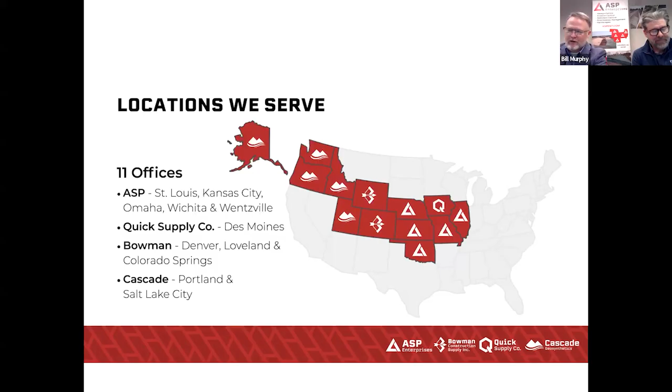As you know, we have a whole lot of solutions. And if you don't know us, go visit our locations and go see us. The banner behind me says ASP because I'm in one of the ASP locations. We're in Kansas City right now, live. If I was in one of the other branches, one of the other companies, I'd have their banner up, but I'm still representing all of them.

And I hope you're seeing this. We'll see if Mackenzie texted me. Product displays and warehouses, we even give tours. Thank you, Mackenzie. We even give tours to some city and DOT folks if they want to see what we have. I've done it in a number of locations, most recently in Bowman Construction Supply in Colorado Springs, which is already outdated because we just opened our brand new branch there last week.

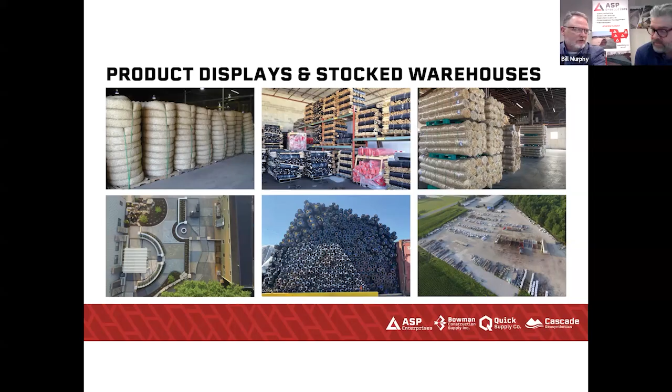I heard that. So, vast inventory ready to deliver. I just talked to one of our drivers here today, he grabbed a little pizza on his way through. Thanks to Todd buying lunch for us here. And I already said his name, and there it is, there's the intro.

I didn't bring your bio or anything. Guys, this is my longtime friend. I don't know how long. Todd Noble, you were in Lee's Summit at the time, and it was September 2014 that I joined us. So, 12 years, 13 years, I've been working here.

Yeah, when Bill originally reached out to me about doing this, I kind of wanted to mix it up a little bit, knowing that your customers see a lot of technical talks. They come to Clean and Green, they've heard Flexamat before, so I don't want to give them just the same presentation. So the thought process here was how to mix it up, how to take a little bit deeper of a dive, let's show inspectors what to be looking for out in the field.

And then when we're doing that, so I've been with Flexamat for a year now and been on the road a lot. And so I tried to incorporate some new projects that we've installed just this year, so that ASP, Bowman, Quick Supply can actually see some of their actual projects from this year in some of these photos.

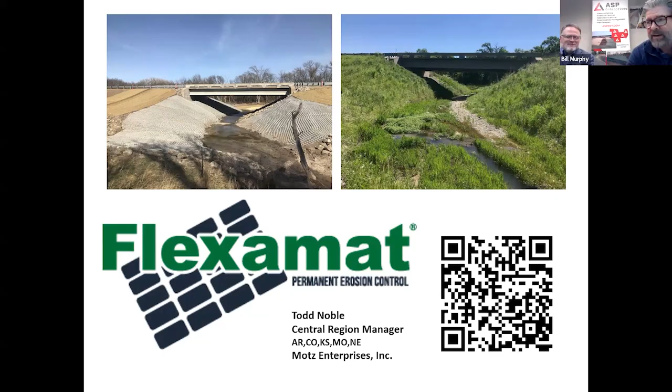So let's talk tech with Flexamat. What is it? It's 5,000 psi concrete, 6.5 inches by 6.5 inches by 2.25 inches tall, in a pyramid shape, embedded into a high strength geogrid with 2,055 pounds of tensile strength in 2 different directions. That strength and pyramid shape allow it to be rolled up and delivered to a job site. Our roll widths are 4-foot wide up to 16-foot wide.

We can do rolls up to 125 feet, but you do not want that - it's way too heavy to lift on a job site. We usually break it into 50-foot lengths to make it more manageable, but we do custom lengths. So if you say, Todd, I need 12 foot by 37 feet delivered to Lenexa, Kansas, we will cut that, roll it up, and deliver it to your job site.

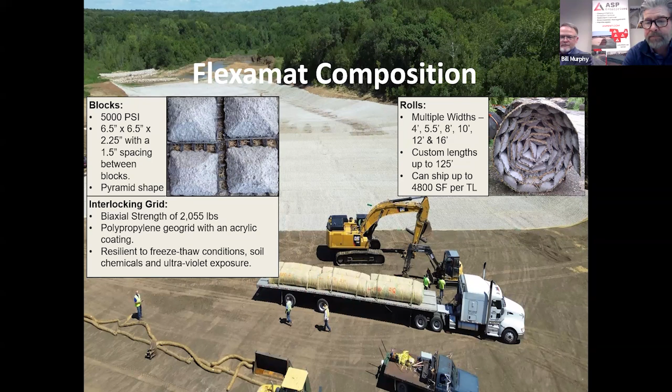When we deliver to the job site, it comes on a flatbed truck. We can fit up to 4,800 square feet, equal to 32 truckloads of 18-inch riprap. So again, one truck compared to 32 truckloads of our biggest foe, which is 18-inch riprap.

You can see on the rolls that they also have some coding on there. If you look real close, it'll say 5.5 by 50s, and there's an arrow pointing to one side of the rolls. They're also marked with numbers, like 242, 239.

That's because we do a layout for all of our installs so that contractors know exactly where to put the rolls. A lot of times when you're getting 7 truckloads arriving to your job site, trying to figure out where they fit in that jigsaw puzzle without a picture is bad news. So we've given them a picture up front. A lot of people call them shop drawings, we call them layout drawings, showing exactly where those rolls go.

All the rolls come with lifting straps to pick off of the truck. So let's get into the different types of Flexamat. We have a variety of options here. Standard is where it all began.

You've got your 5,000 PSI concrete embedded into a geogrid, and underneath that is an Excelsior blanket. Excelsior blankets, from our industry we all know, hold moisture on top of vegetation and prevent erosion. Excelsior is shaved aspen fibers. If I had a handful of Excelsior and sprayed it with water, I'd see that grow 4 times in size in my hand. What that's doing is holding moisture on top of your seed to encourage germination.

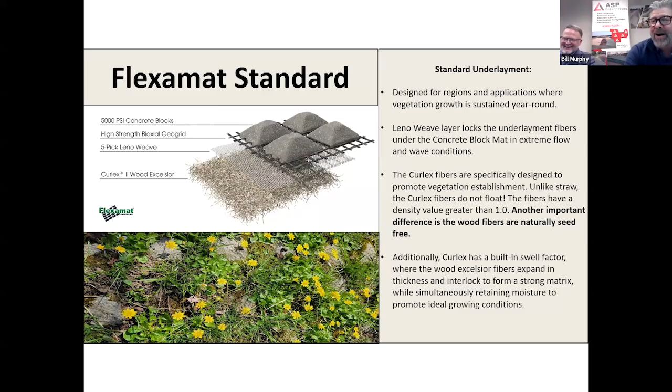All right, so that allows us to get vegetation. We've also made an upgraded feature by adding a layer of turf reinforcement mat to make our plus version. That additional layer is a permanent layer. The Excelsior blanket is going to break down and biodegrade over 18 to 24 months, so it's eventually going to disappear. That layer of Recyclex turf reinforcement mat is going to be a permanent layer that reinforces stems and root structure.

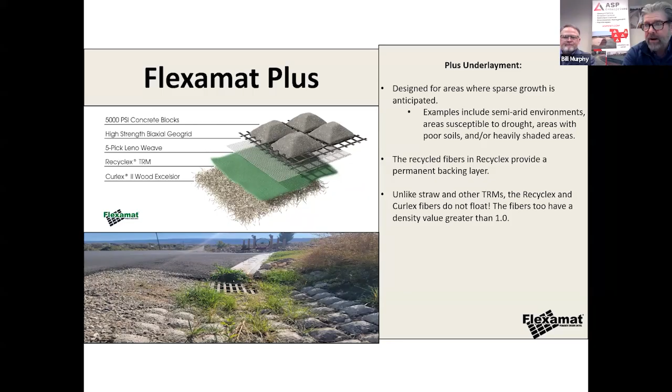That's going to be used for our high flow outlets, high flows around streams and creeks. It's basically used on 95% of our projects now. So if you use one of those two backings, you will have this vegetation.

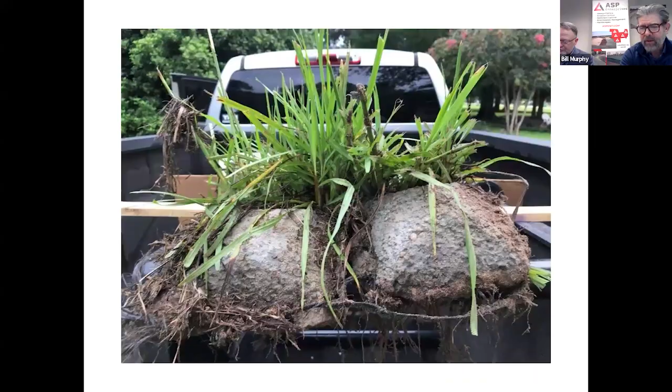This is a GoPro attached to a light pole to show the grow-in period of Flexamat. It eventually just disappears into the vegetation. So here's what it looks like from vegetation growing up through it, and more impressively is the root structure that you get underneath. There is weight to our product, 10 pounds per square foot to help hold everything down, but this root structure and stems of vegetation lock everything into place.

So the other option is a non-woven geotextile, a 10-ounce non-woven geotextile backing. This is for applications where you know you're not going to get vegetation. Think about underneath of a bridge. You won't get sunlight underneath of a bridge, so you're not going to get vegetation. If you're in the bottom of a stream where you have constant standing water, that's a waste thinking you're going to get vegetation to establish there, so you'd use a non-woven geotextile. Also think about drivable surfaces where you want to always delineate where you're supposed to be driving. You don't want vegetation there, so you'd use a non-woven geotextile.

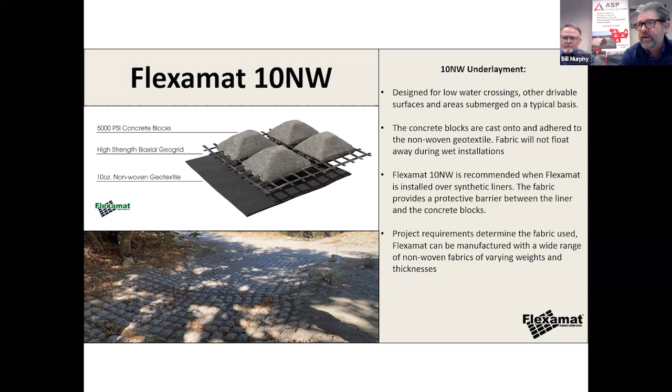Another thing we have added in recent years is an extension. This extension allows us to lock everything into place as a system. So that extension is we're extending the geogrid and the underlayment, the turf reinforcement mat or non-woven geotextile, out 1 to 2 feet past the end of the roll so it can go underneath of the adjacent mat. You drive anchors through that to connect everything together as a system.

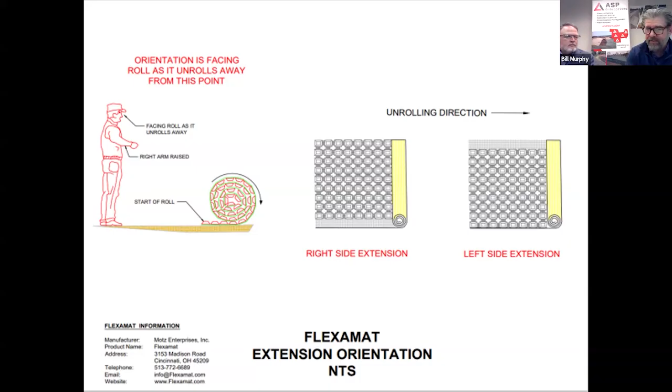Think about pipe joints. Pipe joints are the weak point of pipe, so our weak point is our seams. If we can extend that 2,000-pound tensile strength grid underneath the adjacent mat next to it, now we're locking in as a system and eliminating those weak joints.

So here's what that looks like in the field. When you are an inspector and you are visiting the site for the first time and you're seeing Flexamat unrolled, before they unrolled this roll had an arrow pointing to the left-hand side.

That left-handed arrow was to show them that that's the side that their geogrid extension is on. So they unroll this, it exposes that extension, and then they unroll the next mat right over the top of it. And now when you run anchors along this seam, you've created an interlocking system for the Flexamat.

Okay, let's talk geogrids because there's some fun in that aspect as well. This is probably 10 years ago. ASP, myself, and Flexamat all created this format together on a project in Lenexa, Kansas. We were about 3 weeks before bid. The city of Lenexa says, hey, pump the brakes. We don't want to use this product because we're going to do native vegetation and we're going to maintain that with controlled burns, meaning that they're going to burn off their vegetation and we're worried about it melting the grid.

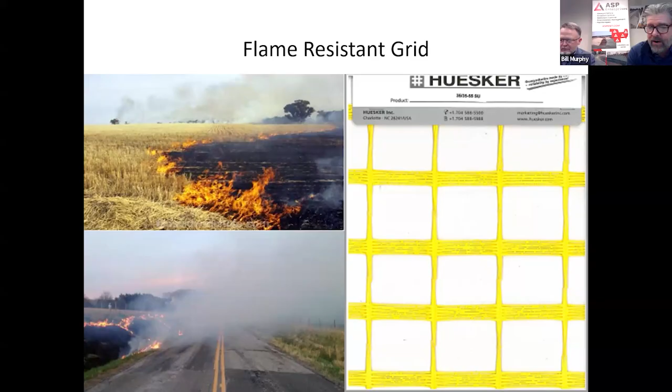Flexamat said, we're worried about melting the grid too. So let's dive into this, because if it's a thing in Kansas, it's going to be a thing in other places as well. So we reached out to our partner HUESKER that makes our GeoGrid for our standard version and asked them, by chance, is there a flame resistant grid? They said yes, it's used in the mining industry, overhead, to keep rock from falling down on miners. So if you're ever in a mine, look up, and if you see a neon yellow net, that's our flame resistant grid. We were able to use that grid on this project.

Basically, everywhere you see grass around this trail is Flexamat. Now, they could have used Flexamat in the riprap area as well. They did not choose to do that on this project.

I stalked this project for 8 years because it was our first time ever using it. We wanted to know that it was successful, but they were never doing their controlled burns. So every time I drove down I-70 and I saw smoke rolling across the highway, I knew that farmers were doing controlled burns of their farms, and I always drove to Lenexa. And after 8 years, it finally hit. They finally did their first controlled burn, and I walked all over this site taking pictures every time I saw neon yellow. I won't bore you with those 100 pictures, but they all look this exact same way.

No melted grid. That's what we wanted to see. We're still getting the 2,000 pounds of tensile strength, holding the whole system together, and they're able to maintain their vegetation by doing controlled burns. Army Corps of Engineers is now testing Flexamat for burn barriers. We don't have the results of that yet, but we're very excited that they've taken note of a product option that we have here.

So let's talk testing. Erosion control testing is done the same way by all your different players that do testing. We partnered with TRI. They put you on a slope and they put your product in a flume and on top of soil, and they turn the faucets on up top and increase that flow over a duration of time. They're taking intermittent measurements, and when you lose a half inch of soil, you fail. Half inch, Bill, half inch, and you're done.

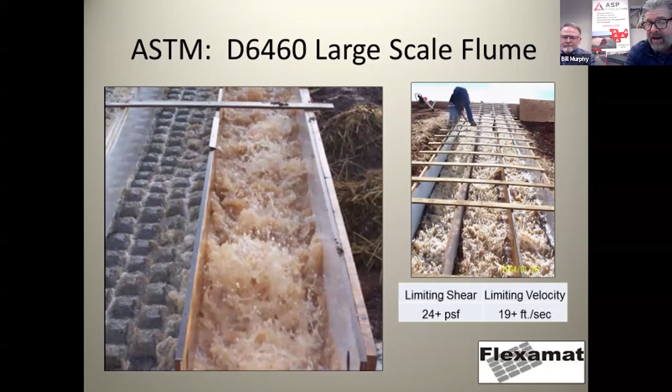So here's our results: 24 plus pounds per square foot of shear, 19 plus feet per second for velocity. Why the pluses? The pluses were because we had maxed out TRI's flume. They were used to testing erosion control blankets, turf reinforcement mats. They were not used to testing a hard armor system quite like this, and we maxed out their flume. So that's why they assigned us those numbers.

If I'm involved, you certainly will. 100%. Murphy's Law—you always will.

I'm going to show you where it's happened to me. This is the world that I used to live in.

I had access when I worked at ASP to a whole portfolio of erosion control products. Whenever I installed a turf reinforcement mat and we got a 2-inch rain event, my first concern that following Monday was I had to go check that job site to see if it held up or not, or if we needed to do some fixing.

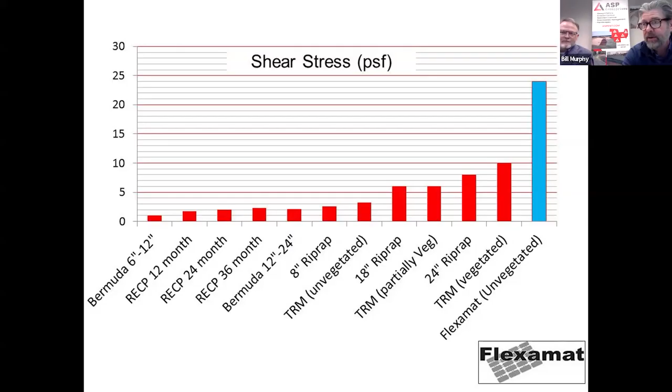So why are we preferred over riprap? It's maintenance. This is the same thing I heard from that crew 19 years ago in Leavenworth, Kansas—they're looking to reduce maintenance. That's twofold here. First off, the maintenance of continually putting more riprap that washes out. If you get a 2-inch rain event through this area, some of this rock you're going to lose because it's not tied together with a geogrid.

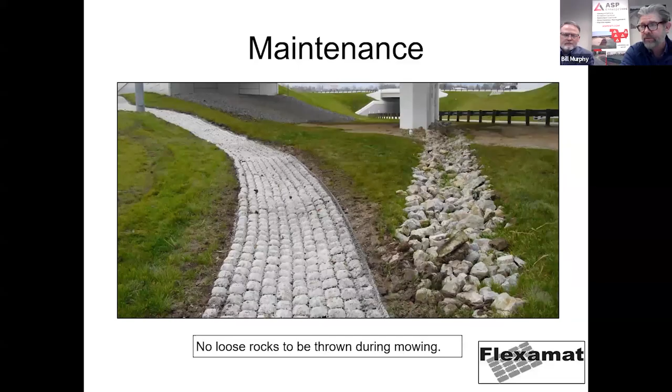The other maintenance issue is mowing over the top of it. Only one of these can you mow over the top of—it will disappear into vegetation and not be hazardous, flinging rocks as you mow over it. Like I said, we just disappear into vegetation.

This is what a project looks like 15 years afterwards. We have a 75-year rating, and our GeoGrid is rated for 100 years.

We like to talk about flexibility because we produce in long straight rolls. So how does that go around curves and bends? We're showing you here—we can bend around curves.

These folks are installing our U-shaped anchors over that GeoGrid extension. They're doing it old school, as I call it, because we have a slide driver that will slide these right into place with a percussion hammer.

We also have a higher-end anchor, the cross plate percussion anchor. It's called cross plate because the cross slips in between the blocks, and it has a 6-foot cable with a gripple head on the end that pivots underground.

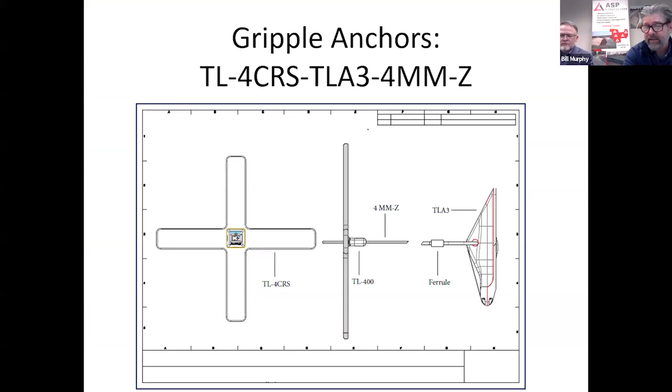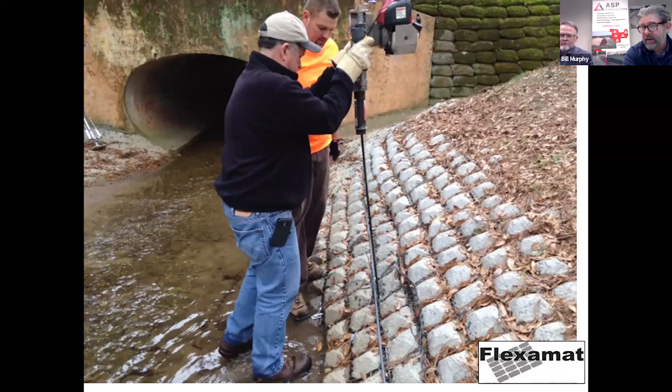Here's how this works. Here's all the different things you're going to need: a drive rod, and a jack jaw—that's a gas-powered T-post driver. You're going to insert that anchor in between the blocks, stick your drive rod on the gas-powered T-post driver, zip that down 6 feet, then pump the jack jaw on the cable two times. That turns the head sideways.

That turns that head sideways and creates a 6-foot cone of resistance underneath the mat, locking everything into place. Then just snip off the cables, and guess what—you can do 1-to-1 slopes now. This prevents the mat from sagging down. If you reach out to us and ask what's the steepest slope we can do with Flexamat, we'll tell you we do 1-to-1 slopes all the time with crossplate percussion anchors, just to prevent that drooping you can get from the mat.

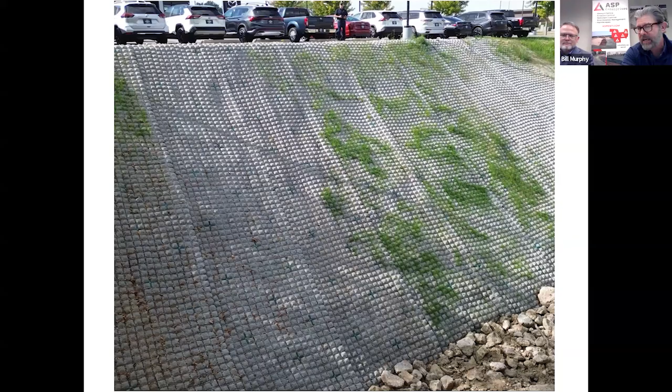We'll also use them when we know that you're going to be pushing our mat near its peak test data.

So we're easy to stage—this is another major benefit. If you were putting riprap in this median, where would you stockpile that riprap? How would you get access to it without shutting down traffic and being a hazard to folks?

The messaging on the rolls allows us to be easily staged, and we're safer to exit off the highway onto. Again, we showed what happens when you drive on riprap versus driving on Flexamat earlier—oh, don't do it. So here we go.

Let's install some Flexamat. How does this work? First, you're going to need to grade your slope, removing rocks, roots, any stumps that are sticking out of the ground.

The reason we want those removed is they hold up the mat. We call this tenting. So if there's a 3-inch, 4-inch rock underneath your mat, there's a void space in between there. When it rains, water's going to hit in that void and reel out underneath the mat. So we want it smooth.

We also need a layer of seed. It's a very important step. Put down your seed. We want vegetation to grow up through the mat. Easiest way to do it. And then you unroll your Flexamat over the top.

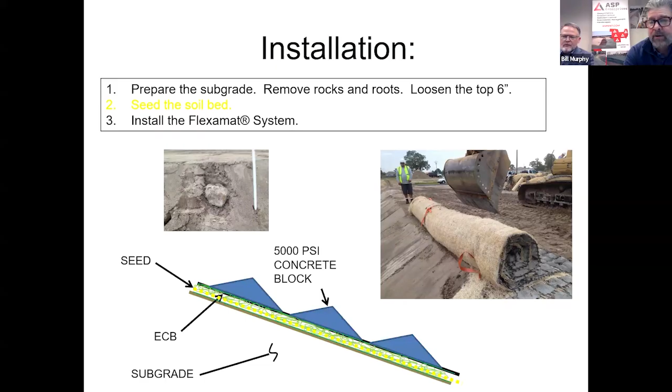So let's talk about a detail, how to install Flexamat. We would like, if you're going to specify Flexamat, to include this detail if you're doing a channel. So let's talk about what's important, what are the important things to cover with a contractor that's installing Flexamat and you're showing them this detail.

If they're installing a channel, number one, and most importantly, make it a channel. So many times I will pull up to a job site and they're installing a channel and they have it graded flat. Big mistake. If you're doing a channel, make it a channel. It says right there, grade channel so that water will flow down the center of the channel. So we want that concentrated flow in the center of the mat.

If you lay Flexamat flat, water is going to hit it. It's going to spread out and find the path of least resistance. That path of least resistance is where Flexamat isn't. That's on your sides. You will have no erosion in your Flexamat area, but you will have giant ditches on both sides because the water has found the path of least resistance. So you got to recess that channel and keep the water on the protection.

Exactly. So if you have a side slope, we're still looking at that picture in the upper left corner. If you have a side slope, we're going to bury 2 blocks so that water stays on top of the mat. If there's not a side slope on the other side, you just take the 2 blocks over the crest.

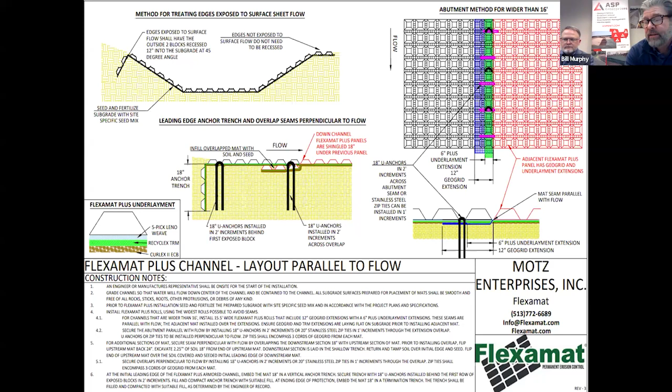Note number 3, you'll see there, again, we told the contractor, put down seed and fertilizer underneath of it first. So very important steps. So let's see some folks doing this.

This is Louisburg, Kansas. This is a project that ASP just shipped here recently, so I don't have vegetative photos of this, but let's talk this through. First off, we're installing an 8x50 mat.

I see that. And this is installed next to a 15.5-foot mat that has a geogrid extension coming out the side of it. So you can see they've laid the first mat in the correct direction so that the geogrid goes underneath of the adjacent mat. And then you can also see that they've dug an anchor trench off to the right-hand side.

So why are they doing the anchor trench now? Well, because it's easier. Dig that anchor trench now, and then you can unroll that mat and it'll just fall right into place. The other thing that I like about this photo is that open bag of seed. That tells me they are very engaged in seeding the area during install.

These were first timers. They had never installed Flexamat before. I'm proud of them, they were pros by the end of the day.

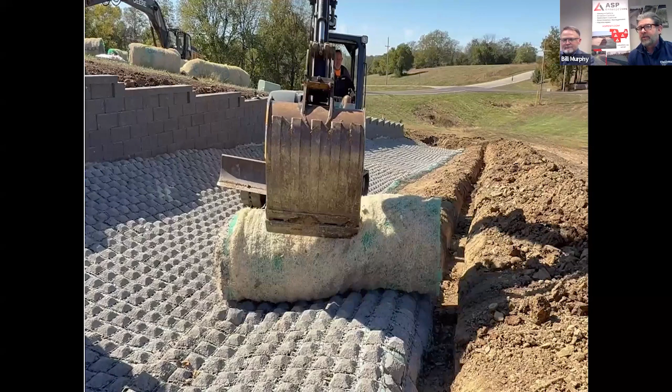Let's watch them do it. Another thing that I like them doing, they have a rubber track mini excavator here on top of the Flexamat. We don't want steel tracks on top of the Flexamat. And also, if this area wasn't protected yet and you have a giant excavator right in the middle of your channel, you're messing it up as you're installing. So I like that they're doing rubber track, driving right on top of the Flexamat.

They're also using a flat bladed mini excavator versus teeth. Teeth can poke down into the mat. A flat blade works much better. So they're doing everything right here. I like to send this video when somebody asks me, how quickly do you think I can install Flexamat?

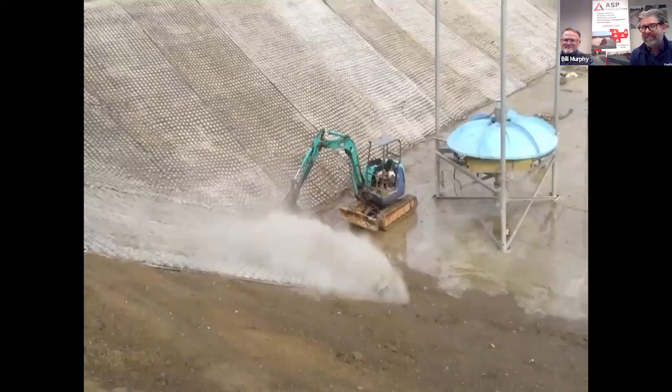This is 16 foot by 50 foot, 800 square feet, installed in 7 seconds. So the majority of installs look much more like the first video I showed you, but it does show you how quickly this can go in.

So imagine if you were doing riprap right there. You still have to put down geotextile. I live in Kansas and we get wind, so you're going to need to pin down that geotextile everywhere before you start putting in riprap. So even though this hasn't been anchored in place, there's a lot of anchoring required if you're going to put in riprap in this size of project as well.

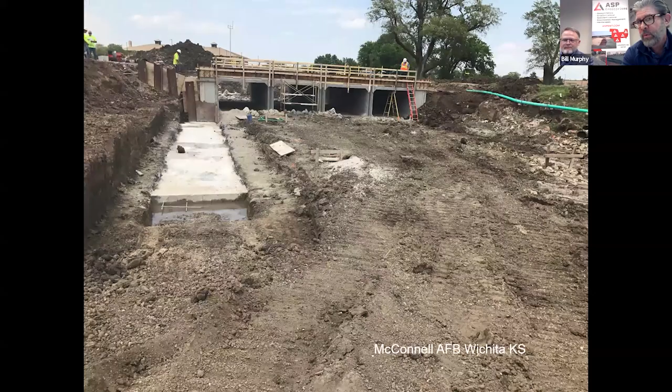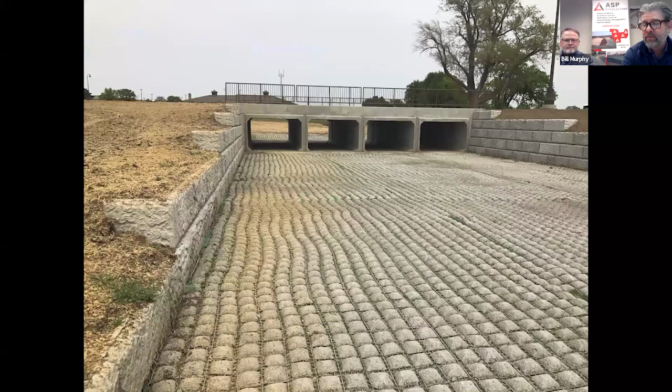So that first detail I showed you was installing Flexamat in a channel that is parallel to flow. This is McConnell Air Force Base in Wichita, Kansas, and this is what it looked like after Flexamat was installed. This channel is a little different in that you have big block on both sides of it, so you can lay it a little flatter here because you're controlling that water on both sides. You can see the mats are run parallel to flow because of the seam running down the center there.

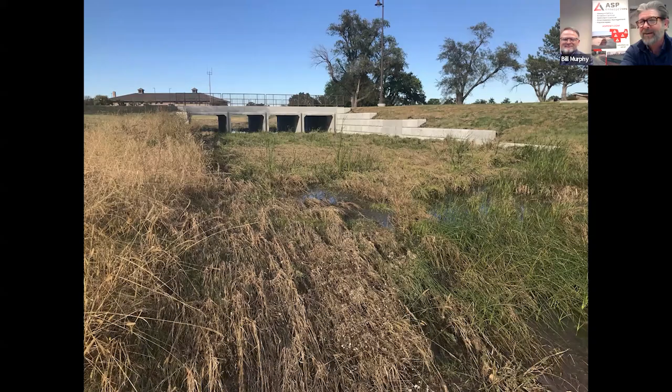And let's see what it looks like today. Flexamat just completely disappears. Given that map I showed you earlier, I drive all 5 states looking for those dots. They're so hard to find because they all look like this. Try driving around finding Flexamat when it's just all green grass.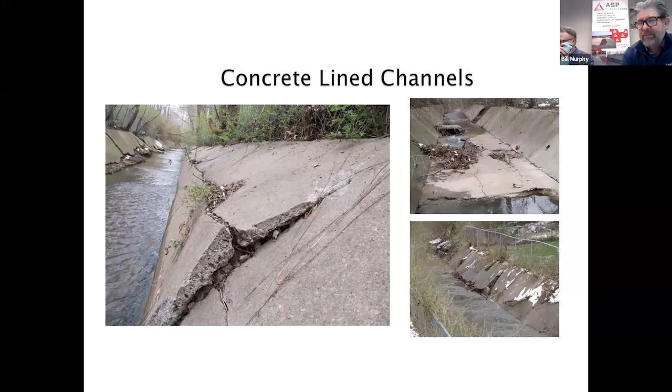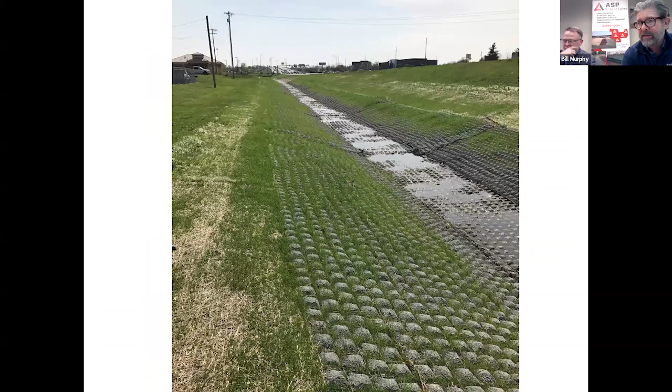So concrete lined channels, we replace a lot of those. Here's one in St. Louis, Page Avenue. And here it was right after install, just starting to get vegetation when the flood comes through. So again, this is where in my previous life I would be waking up knowing if this was turf reinforcement mat, I'm probably going to have to replace that. We didn't have to replace that with Flexamat - the weight of the material was able to hold it in place, and then that's what it looks like today.

So let's talk about perpendicular to flow. All the other areas I covered earlier with parallel to flow are the same - now we're just laying mats perpendicular to flow because it's a super wide channel. So if you have a 52-foot wide channel, you just lay the mats in crossways.

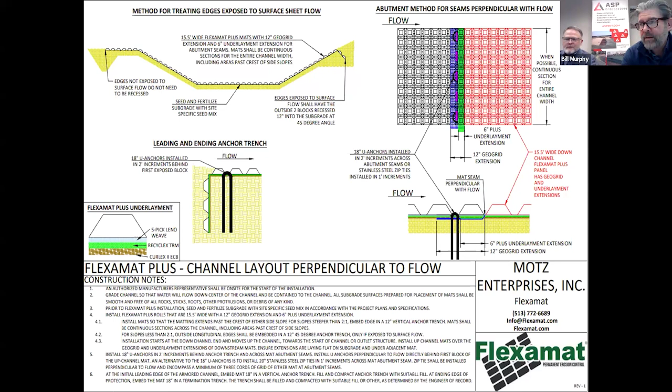So here you can see the mats are laid in perpendicular to flow. For slope armoring, important things to note: we want to anchor trench the toe and anchor trench the top, and then we want to bury that leading edge. So if you have water coming in from the side of this, you just bury that.

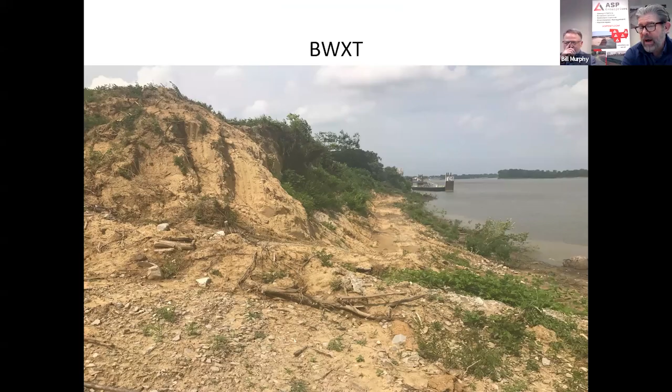And here is a slope for BWXT, a nuclear power plant. That's the Ohio River, and that's what it looks like when you get a flood event that came through that area. Being a nuclear power plant, they have way more important stuff to worry about than maintaining riprap.

So they put in Flexamat, and here's what it looked like after the first flood that came through. So again, you're going to get a flood event after install. Here's what it looks like today.

Wow. Yeah. I don't think that we'll ever be allowed back on site with a drone for a nuclear power plant. We had it took a lot to get those photos off of that site.

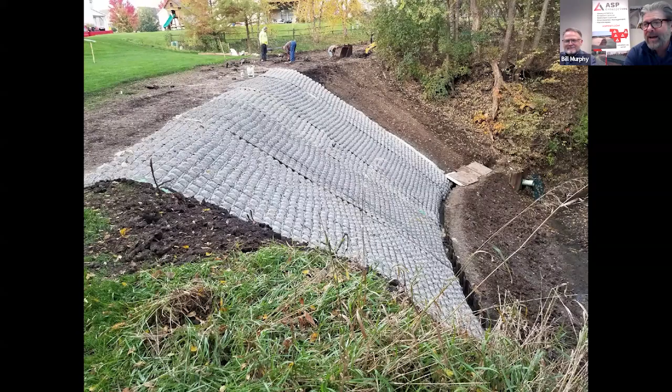So, all right, here we got a slope. They've done everything right here: buried that leading edge, buried the bottom edge, even put in sheet piling. Talk to your ASP rep if you'd like to install sheet piling at the base of your Flexamat as well. And here's what that looks like. All the other area where you see vegetation has eroded upstream from it, but this area is still that same elevation. It doesn't look hardly even touched.

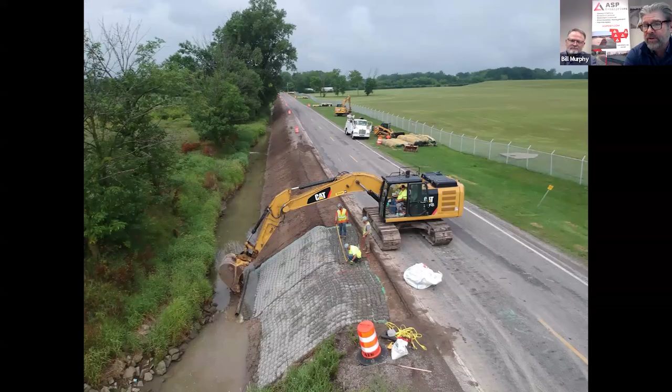Roadside slopes, we do a lot of these. You can actually bury asphalt directly into the top of us to create that transition from water from the roadside down your slope. Here's what that looks like, fully protected.

Litzinger Road—pay attention, Adam Litigan, this was your project in St. Louis. This is an ecological center, so think lots of butterflies, natural vegetation, bees.

So, all right, let's talk about outlet armoring. High flows in this area—a couple things to note here. We're giving guidance to engineers for the protection area. Let's take a look at a 48-inch outlet with 100 CFS: it's going to be 16 foot wide, 20 foot long.

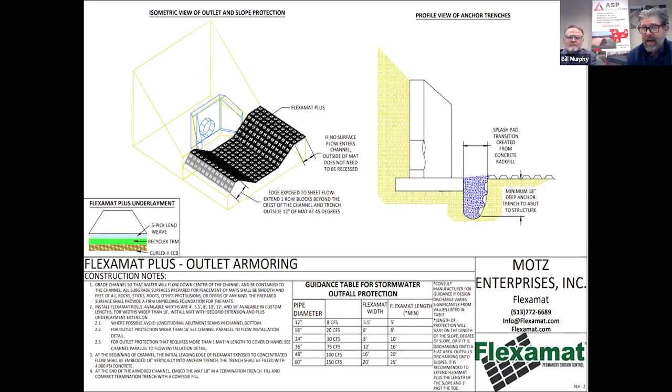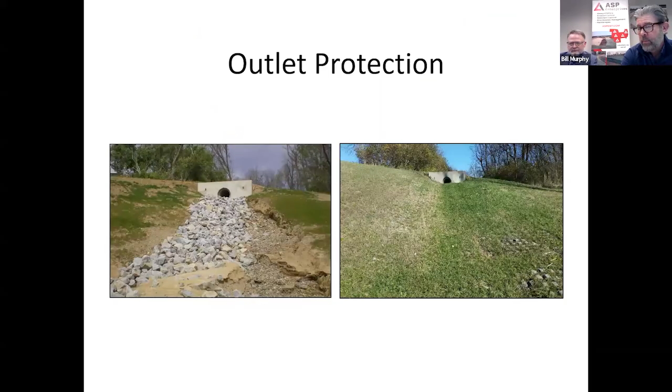And the important thing to do here whenever you're installing around an outlet is to bury the leading edge and fill in that transition with grout—extremely important. Here's what it looks like if you have a slope up ahead of your end section; you'd grout in that area as well. And then what you end up with is something that looks like this—it just disappears into the vegetation.

You can also get creative with your grouted area and create a splash pad. I love this because it makes it easier to maintain. When this thing fills up with debris, they can just take a mini excavator in here, scoop out that debris, and not have to worry about messing up any of the protected area.

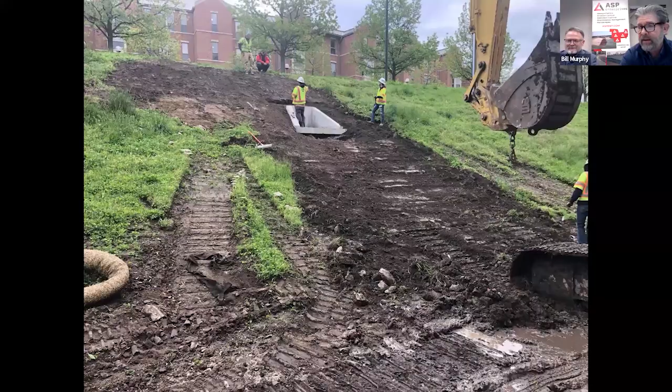So here's an end section. Let's watch these gentlemen install. They have laid their Flexamat over the top of it, cutting out and removing the Flexamat that's not necessary, and then they've grouted that in. You also notice that they also have a defined channel—they haven't just laid it flat, so we like that.

Shoreline armoring: you go a minimum of 3 feet extended below the normal water line, and then we're going to trench in the top of the mat.

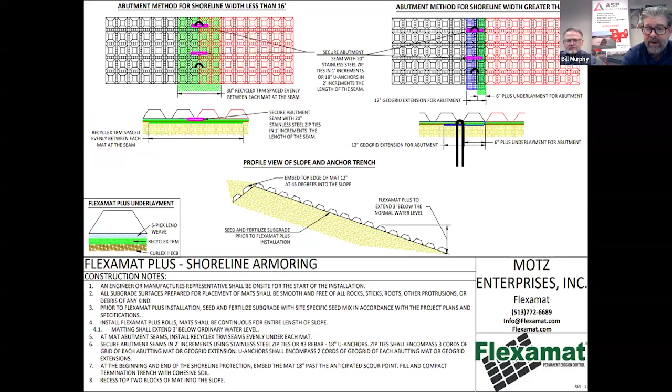Here's what a homeowner was facing—they were losing real estate from wave action. They put in Flexamat. The rest of the neighborhood saw the Flexamat and convinced the HOA to collect money and install Flexamat in the entire pond.

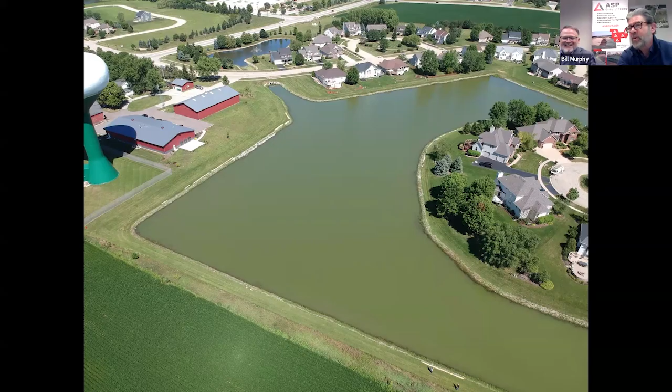Do you have a good HOA? I am the HOA. My HOA took 2 months to approve a paint color. So, man, I'm very impressed that these guys collected money.

But here's what it looks like when it's fully vegetated—grass just completely encapsulates the Flexamat, beautiful. You can still see the Flexamat underwater, but you can mow right up to that edge.

Here is Oberlin, Kansas wastewater treatment plant.

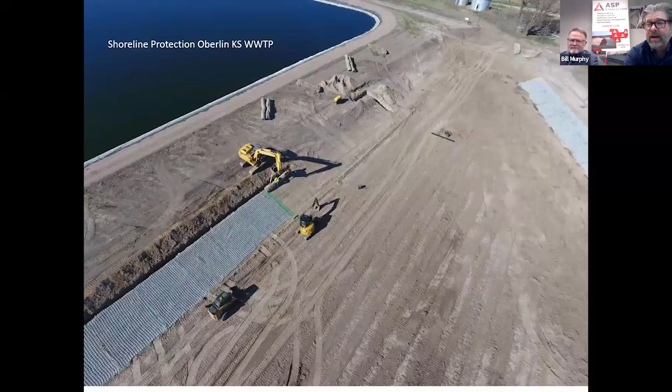I think this was a Lynn Ewald project, and they wanted to protect their shoreline with something that required little maintenance. We were an alternate to riprap on this job, and there's a rock quarry about a mile away. As Lynn can attest to, we got smoked on this project for being a bid alternate.

But again, the same theme I heard 20 years ago was that they don't want to deal with the maintenance of riprap, so they chose Flexamat. Here's what that looked like, and here's what it looked like two weeks ago. So here's your update, folks. I'm flying a drone over this wastewater treatment plant.

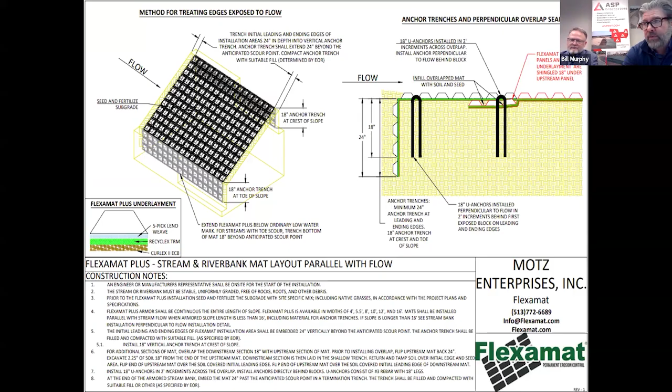Let's look at this Marion, Iowa project. I call this our calendar shot project. This was a trail crossing a pedestrian bridge that ran over top of Squaw Creek, right on a bend, so a highly erosive area. They knew this area was going to flood and get overtopped.

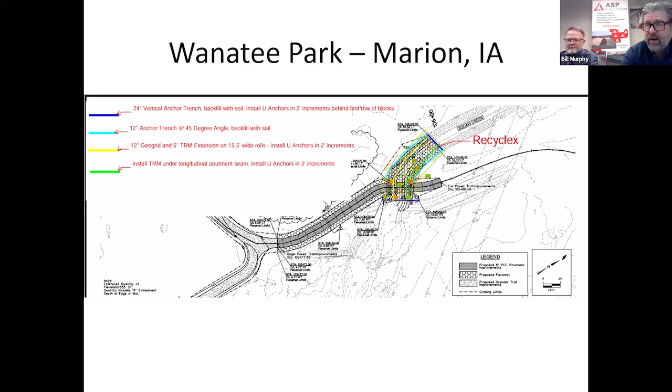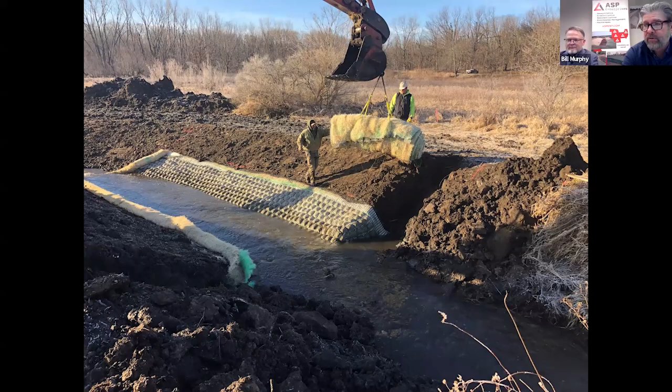Here is that S-shaped creek. You can see the bridge abutments have just gone in, and they're going to install Flexamat in the running water. They've cut their leading edge, burying it and unrolling Flexamat. Here's what it looked like during construction, post-construction, and then what it looks like today.

So again, that gave us a calendar project, but not to be outdone, at Adams Park in Omaha, Nebraska, we were asked by this engineer what geogrid strands can we cut to put in live plantings. So we gave them a diagram of where to cut the geogrid to still maintain its structural integrity and install their live plugs. This is what they ended up with. Just a couple of incredible projects for us.

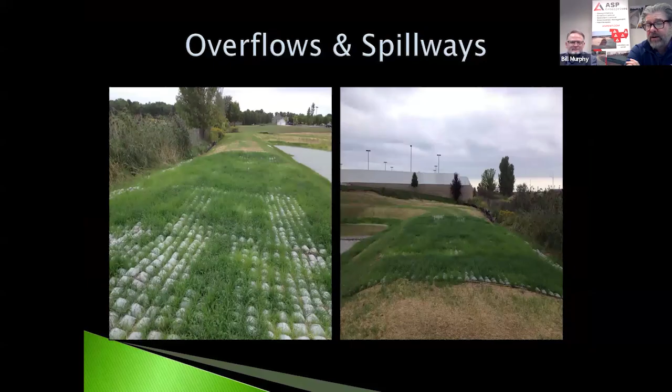Okay, let's talk overflows and spillways. Lots of detention ponds means there's a lot of dams and overtopping areas that need to be protected. Flexamat is used on a lot of those applications.

This is the Barnes Water Quality Project in Colorado Springs. If you're familiar with the minor league team, the Vibes, that's a s'more, by the way. That's cool, man. Yeah, I've never seen that.

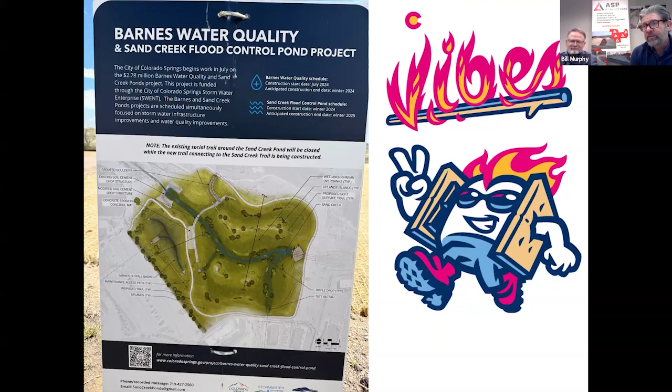Just up out of this picture, if you look real close and squint, you can see the stadium for their ballpark. This is the detention pond that overflows into a creek area. I don't have vegetated photos of this, but this is what it looked like during construction.

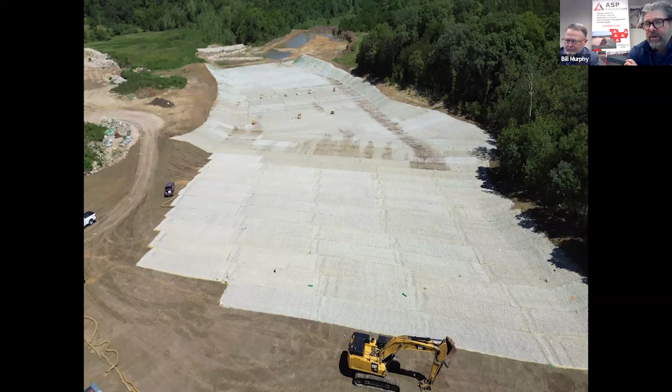Very impressive. Here's an even more impressive one. This is that project in Garnett, Kansas, that was 8.5 acres of Flexamat. I was out on this project a lot, and this is the town's drinking water. So when this baby overflows, it hits 8.5 acres of Flexamat on a curved shaped funnel, which definitely needed higher strength protection.

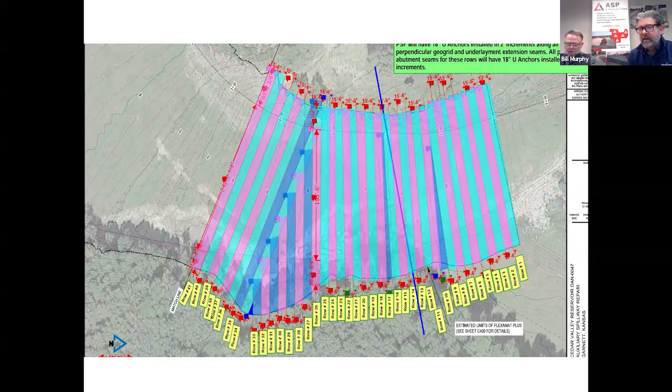So let's see what we did with the layout. We worked with the engineer since they only had so much budget, so we needed to make sure it came in on budget. We worked with the engineer on their layout up front so we could know exactly how much material was needed. You can see wherever we're readjusting to maintain perpendicular to flow, there's a little bit of waste from overlaps, and we gave the engineer all that information.

So that's rows 1 through 41, and here's rows 42 through 78. This was actually 79 truckloads, Bill.

Bill, do some math for me real quick. What's 79 times 32? A bunch. Because it takes 32 truckloads of riprap for every one truckload of whatever it is. So I think it's over 2,400 truckloads.

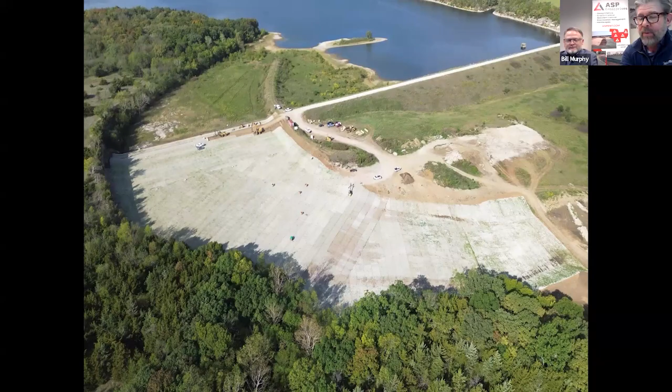So think about this dam. You are going to have 2,400 truckloads of riprap driving across that dam. No thanks, that's a rebuild-your-dam type moment. Exactly, and they did not want that, so that's why Flexamat was also used.

When they're installing, if you look real close you can see the neon yellow. That means it's flame resistant geogrid, which means they're planning on maintaining this with controlled burns to kill off any unwanted vegetation.

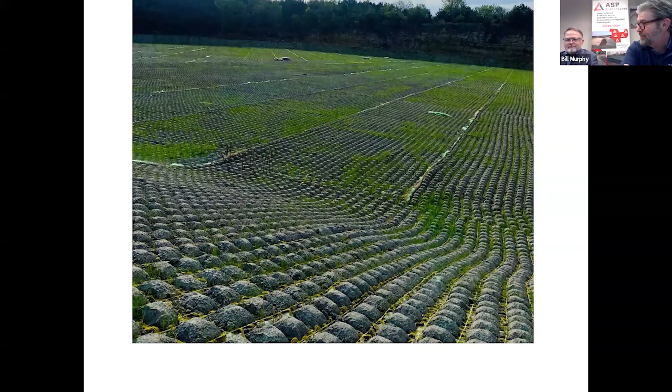If you look real close, you can still see a pallet of anchors up there in the picture, and they haven't started cleanup. That's because they were still installing this. So this mat was vegetating before they had even finished installing it. Very impressive. Here's a video.

Oh, when I was a kid, if that thing was over top I'd run out there and try to slide down it. Safety, don't do that, folks. We don't want you with your sled out here.

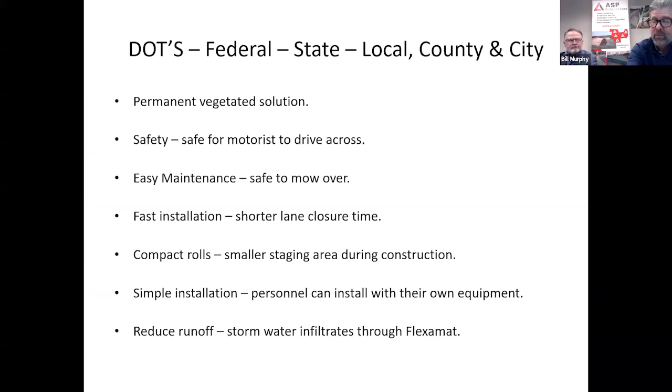So DOTs like us because we're a vegetated solution. We're safe to exit onto, and we reduce maintenance. Again, the maintenance of replacing riprap and being able to mow it. What are you going to do with weeds in your riprap? Spray it.

Nice. Let's talk KDOT, because KDOT was a tough nut to crack.

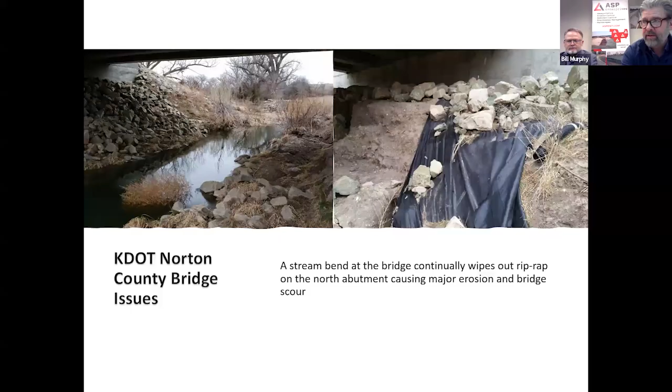I approached them about giving us a headache. What's your biggest maintenance riprap headache? And they said, oh, there's a bridge in Norton County, Kansas, that is a pain. It's an S-curved creek that wipes out the riprap on one side only. So every two years, they're going in and replacing the geotextile and riprap in that area.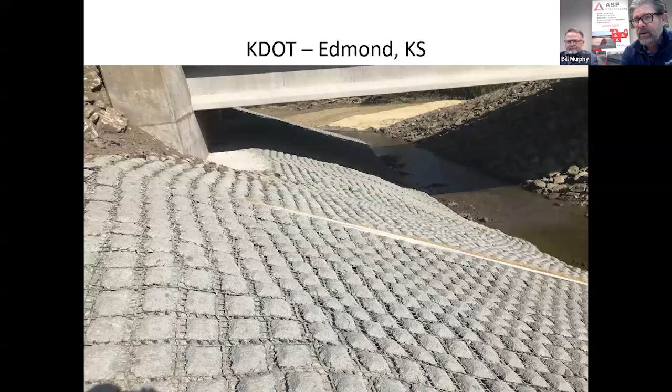So we don't have to do that today. But here they are grouting around that bridge abutment. That's what it looked like finished. Still looks good. You used this to promote this.

You forgot to include this picture, Bill. Yeah, I like that one. This is where it becomes impressive. Yeah, there's a series of like four of them. It's wonderful. Exactly. That's the best.

So, and then we also do access road armoring. So basically you're going to use a non-woven version of Flexamat. You're going to fill in with crushed stone and you're going to create a drivable surface like this.

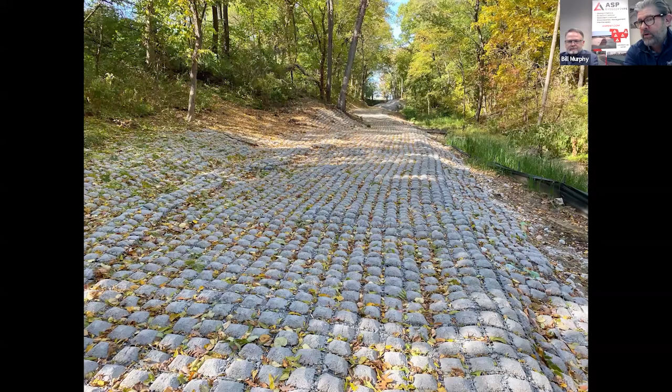Cool. Small boat ramps, large boat ramps. This is Castle Rock Reservoir. This is lined because it's drinking water and they want to be able to get their John boats down to clean out their structures. Here, see a lot more of these.

Yes, low water crossings. Okay, so that shiny thing in there holding it together, that is high strength stainless steel zip ties. So we don't want to use the U-shaped rebar anchors first. It takes a lot to get a rebar anchor through two layers of non-woven geotextile, and we don't want them breaking off and puncturing tires. So we use a high strength stainless steel zip tie to hold those mats together.

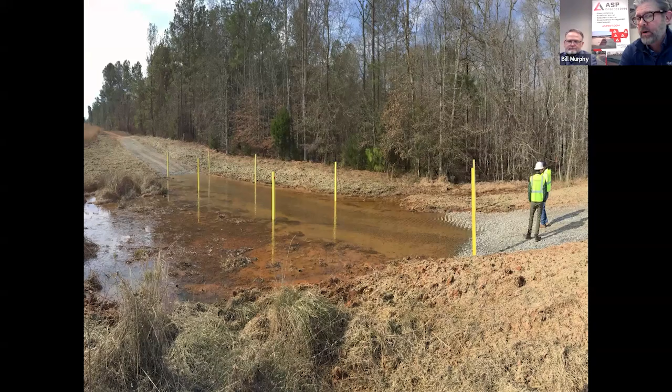Here it is being delineated where your drivable surface is. You can look real close, you can see the Flexamat underneath of it.

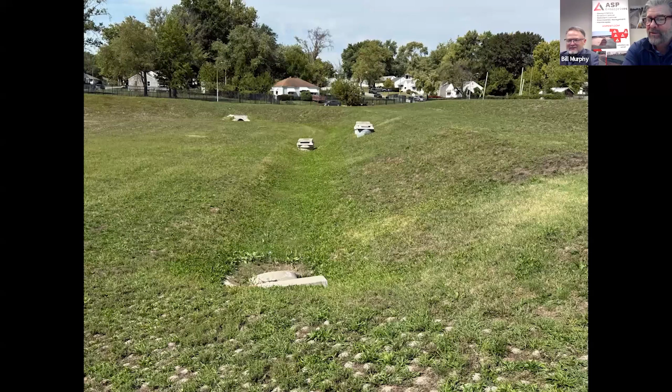I love this project. This was St. Louis MSD. Very smart design here because they were creating a channel and they knew that they were going to want to get in that channel to clean out these structures. Pay attention, Steve Polk. So they used Flexamat as the channel and the drivable surface. I thought this was two for one, Bill. Here's what that looked like after it was done. Nice. Here's what it looks like today. Pretty incredible. All looks green grass, still have drivable surfaces that you can drive right up to.

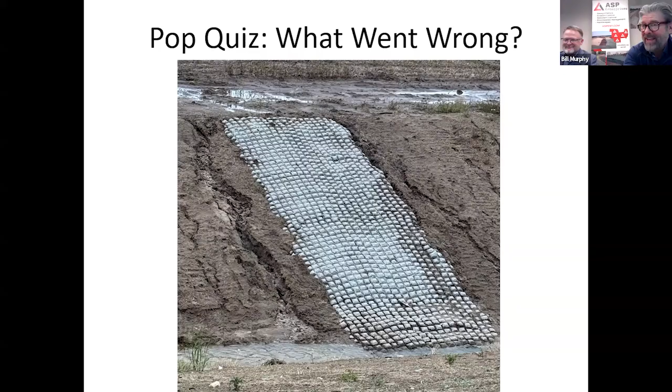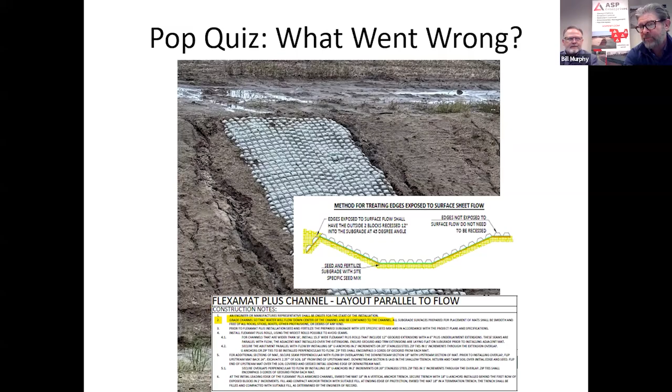On that guy, so how they're fixing this is they're going to pull up that top, cut down a little bit, and then they're going to have to drive their Bobcat over the top of it, hoping for loose soil, try to press that down. They're going to have to build up the sides to guide it right the first time. Exactly, so again we told them exactly what to do here. So let your inspectors see these details, put these details in your plans so that a person seeing Flexamat for the first time knows what they're supposed to be doing on this project.

What went wrong here, Bill? Oh my gosh, common sense is not common. That overlap should have been put down first, and you put the next roll on top of it, anchor it together. Yeah, we're creating a system here, so I can tell which direction the water is supposed to be flowing on this project. It's supposed to be flowing from the right to the left of the screen.

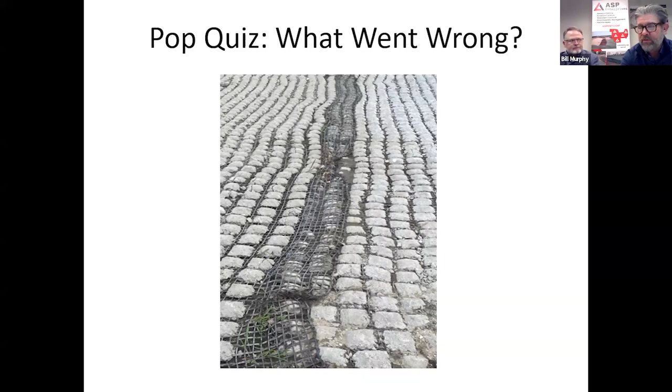Your geogrid is on the right, so it goes underneath the mat next to it to create a system. It's supposed to. So yeah, if you're an inspector and you walk up and you see exposed geogrid, you smack the guy. Oh no, you don't, you use your words and talk through it. I'm not smacking nobody, I'm 3 for 3.

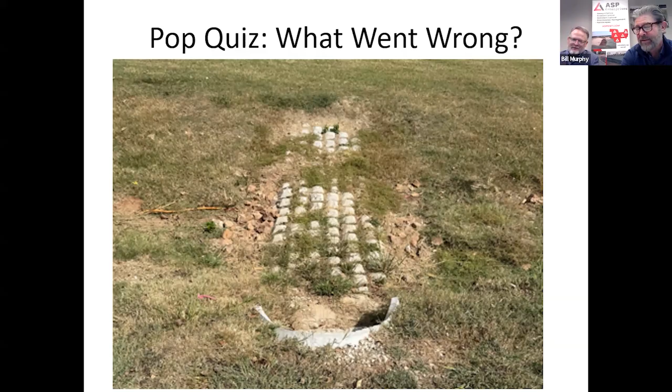You got it, and then it should also be recessed. The grading's not good. This should be a channel, because you're conveying water from this flared end section—it needs to be taken out back. But most importantly, let's cover the area where the water is going to hit. You can see the angle of that flared end section is going to project water directly onto the side. I have so many other things to say that are derogatory and negative.

Again, we covered this earlier, a 48-inch outlet. This isn't a 48-inch outlet, but it gets 16-foot wide, 4 times—I did that math in my head. So again, this is probably a 24-inch outlet. We should be 8-foot wide here, 10 foot long.

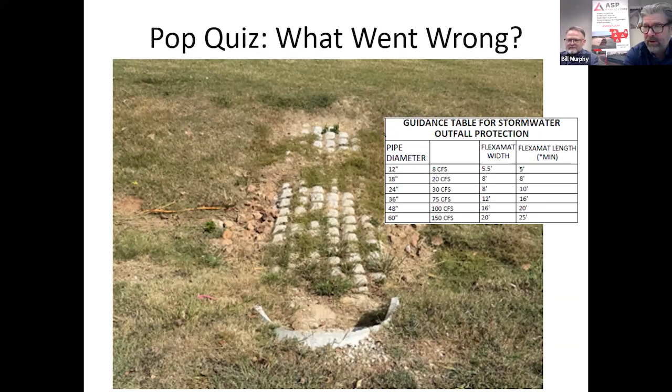Okay, this is a trickier one. How ironic, it looks to me like you're tricking me. I don't have... I got new glasses.

Seed blend, yeah, probably didn't use it right. Probably should have prepared that as a seed bed prep, got the ground ready, and got it seeded to make sure we can get some vegetation established. That's part of it, and let's see what else—yeah, that's mostly it. I would really make sure they got that thing vegetated.

This is the city of Lee's Summit—no offense to them, they're wonderful friends, I wouldn't beat them at all. This is their new police station that they just built. Our friend Carissa McMullen specified Flexamat because she knew these curb cuts were going to be highly erosive.

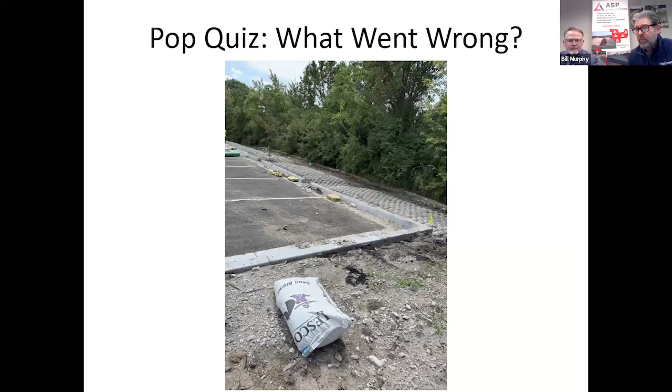Plus there's a creek running back behind there, and it flows full. She didn't want it affecting their parking lot area. Well, it was. So the issue I find here—I walked up on this project, I had went to get some supplies from ASP, came back to the project, and I see that they've already unrolled the Flexamat, and I see an unopened bag of seed.

Oh no, is that what that is? I couldn't tell, it was full. Yeah, oh that's what I wondered. Laying on its side, yeah. We also have soil amendments.

We can feed that soil and make sure it's fertilized properly, and even add jump start, whatever you want. That's a great point you make.

You can rely on a lot of industry experts, like any one of the Hale Holdings distributors, to do free soil tests—oh, they love it, free, bunch of nerds, free. That gets you a lot of data points. I've seen some of these free soil tests provide more data points than tests that cost $200 to $300 from local universities.

So reach out to folks at ASP, Quick Supply, Bowman, Cascade. Ask them about doing a soil test so you know that you're going to grow grass, first of all. But hey, let's also put down seed.

So luckily, this was a small enough project—he did put down seed. He put the bag of seed right on the ground. He put down the seed, yes, but put down the Flexamat before the seed. So luckily, it was a small enough project that they hauled in soil to do soil fill and seed from the top. But again, that didn't have to be done.

You can grow grass right up through it. You don't have to have that additional expense of bringing in soil.

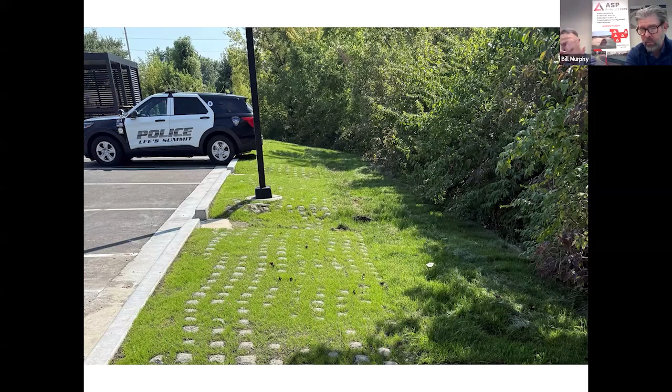But that's not on the designer, because I can tell you, Carissa—you know her, your friends and neighbors—she's awesome. She wanted this thing, her vision was for this to be vegetated. Somebody just didn't communicate that to the boots on the ground. 100%. How did I do?

Hey, was that 5? That was 5 for 5. High five! Listen, high five. I've never high-fived for the 5 for 5, I've never done that well. Again, I told everybody you're a Hall of Famer.

So that's hilarious. Okay, so I always get asked about cost, so let's talk costs. Obviously we don't control what a contractor is going to charge to install it, so let's look at some bid tabs here. I don't like reading to the audience, but that might be hard for them to see if they're on a laptop like mine—I was going to read it right now.

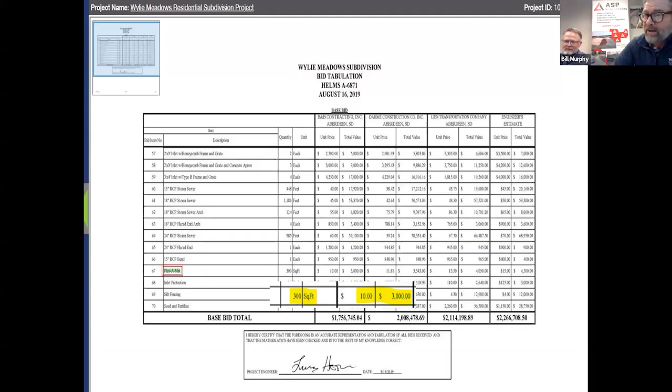300 square feet, so this is a small project—went for $10 a square foot installed. Here's a larger project, that one I showed you with the s'more mascot, so cool, the vibe. In Colorado Springs, that was 7,450 square feet, and that went for $7.92 installed.

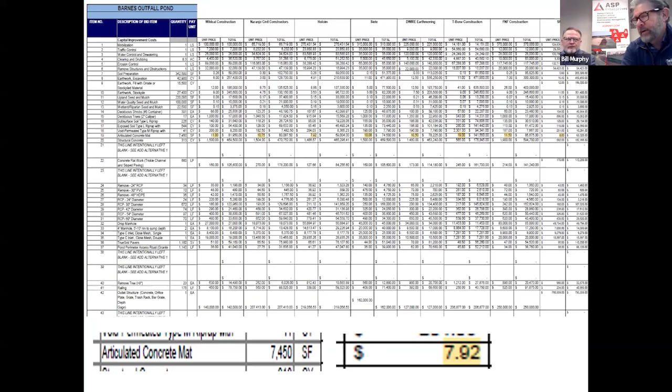So obviously there's a lot that goes into install, your soil and especially if they do it right, the grading, all of that. So that's all included in there.

Wait a minute, seriously? That's all I have, dude. You did way over 100 slides and you're ahead of time. That's so awesome. How far ahead am I?

Hey guys, jazz hands, I guess we can't see them. I went to see a friend of mine, one of my goddaughters, she was in show choir, I guess they call it for high school. Her group knocked it out of the park. I stood up and clapped, and my family says I'm notorious for clapping way too loud. Some lady grabbed my shirt from behind, another lady turned around in front and pointed so aggressively at me, I thought they were going to hit me. She was looking around like, you see anybody else clapping? The whole place stopped, they're looking at me, the kids on the stage are looking at me. Apparently if you go to one of those, you're not supposed to actually clap.

Oh, you're supposed to go like this, jazz hands. That's how you applaud for them, because it's respectful, classical, whatever, a beautiful piece. You're not supposed to physically clap. And man, I did like I was at a monster truck rally or WWE event.

My family made fun of me for years that I about got beat up by some moms and grandmas. Next time I'll be in Fort Worth for IECA. When you're in my audience, you're gonna come to one of my presentations. Don't, I think that means something else. Let's see if you remember that.